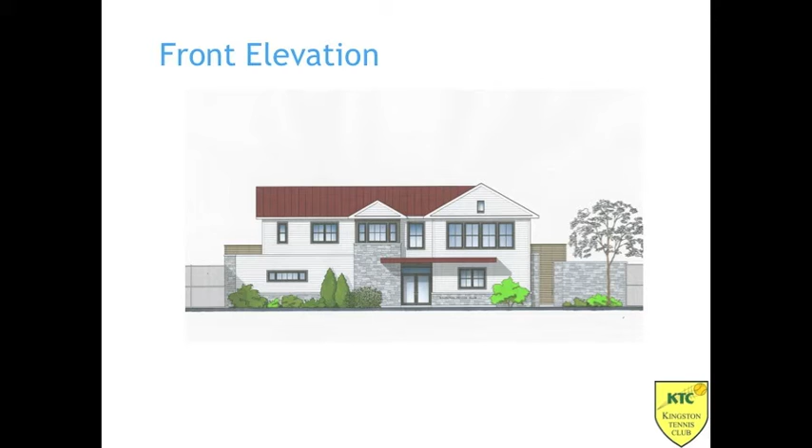As I mentioned, we wanted to maximize the south lawn, which is back here. So we put the building right up against what is now Court 7, and we've integrated the hitting wall in that end part of the building. But we also didn't want the building to feel jammed up against that court, so we set back the second floor about 8 feet, which provides the balcony around the top.

And the actual footprint of the ground floor is slightly larger. It's about 2,150 square feet, and the second floor is about 1,850. This is the rear elevation.

So we're providing a lot more glass here. This whole area would be the lounge and would be more open to the deck area. This lower element would be somewhat of a bench, I would say, just a low element that people could sit on. It will also prevent balls, if you're playing on the court right there, from rolling onto the deck, that type of thing.

Provide viewing opportunities during matches, things like that. As Paula mentioned before, we have the door to the accessible washroom right there. That would be the main door through to the lounge and entry.

Then upstairs we have decks that wrap around three sides, so all the courts would be visible from up there. And we have the stairs going up.

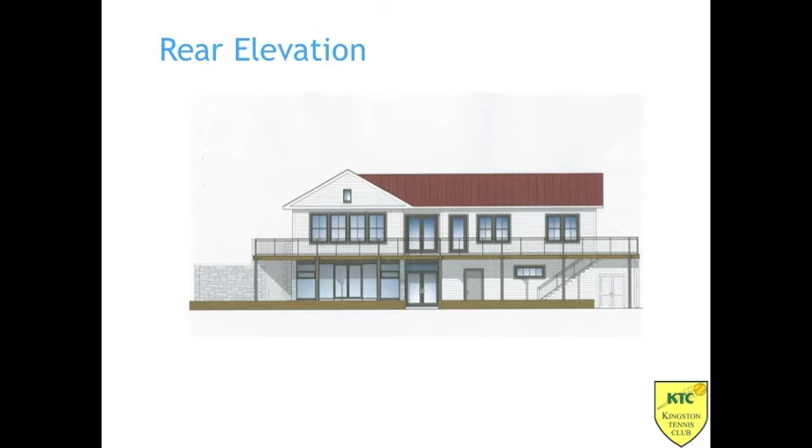This is the north elevation, and that whole wall would be flush with the chain link fence and provide a hitting wall. It's about 30 feet long, so two people could easily practice there at the same time. And again, the deck above.

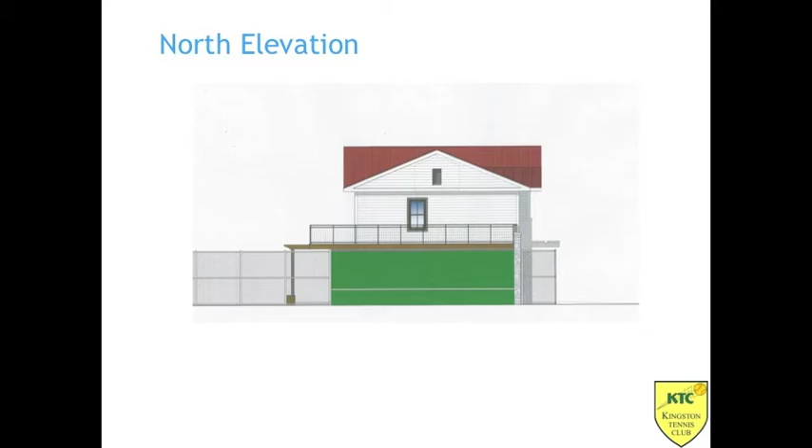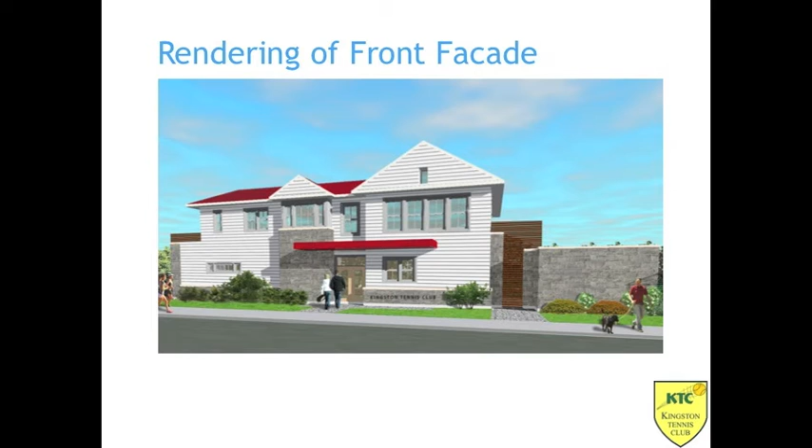So this is a 3D version of the front entry to give you a better perspective of it all. And that's looking from, I guess, roughly where the clubhouse is now.

One aspect is that the columns for the upper deck are projected out farther than the deck. We didn't want the deck, which comes out about 12 feet, the upper deck to be that deep so it wouldn't cut off light from below. So we made the upper deck 8 feet and kept the columns out where the bench is so that they wouldn't interfere with the deck and movement below.

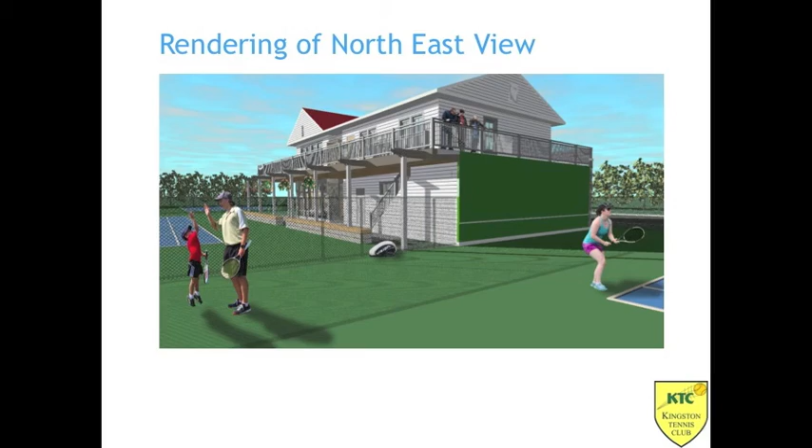And that's looking from the other side to the deck area, and gives you a view of that bench along the edge too.